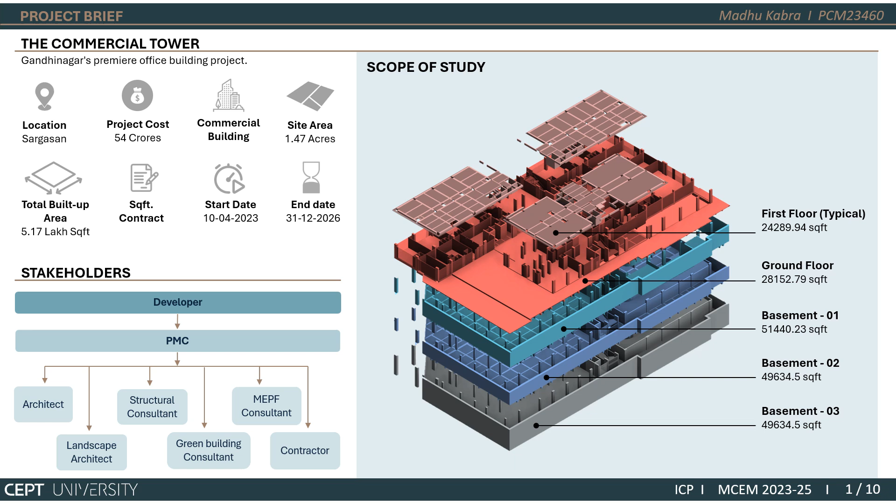The project consisted of 3 basements and ground plus 14 floor structure. For the scope of study of this semester, we have taken 3 basements, ground floor and first floor. The stakeholders involved in this project are the developer, the PMC, then various consultants such as architect, landscape consultant, structural consultant, green building consultant and MEPF consultant, and the contractor who is going to construct the building.

The project was studied in groups of 4, where each member assumed different roles. My role was of an architectural consultant and mechanical consultant. 2D drawings were taken from the site and a BIM model was generated out of it based on our respective roles. The architecture model was developed till LOD 400 level and mechanical model was developed till LOD 300 level. Major hurdles that we faced in the process was that we didn't find relevant details in the CAD to generate BIM out of it, and the lack of software knowledge.

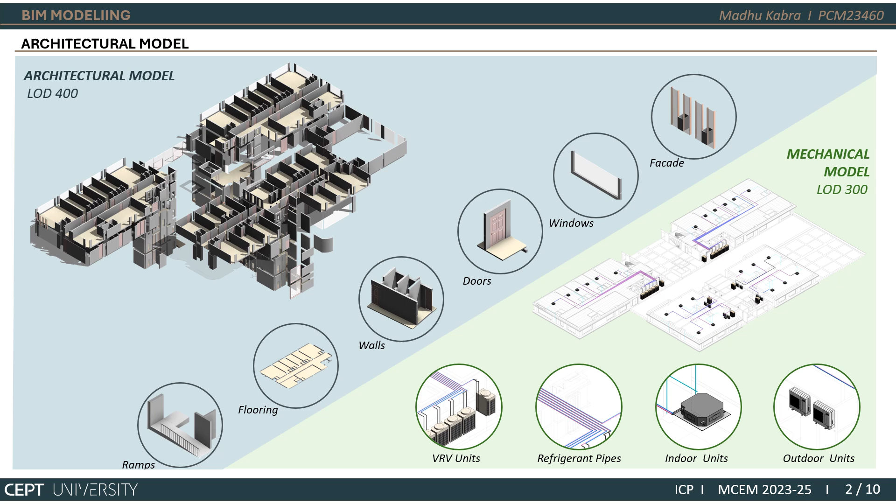BIM models for all the disciplines were made, and then clash detection process was run for each discipline so that a clash-free model was generated. After that, a quantity takeoff was done, which is basically a process to estimate the material, resources, and labor needed to complete a project. So for this, we have done quantity takeoff for architectural, structural, and all the services. As an example, I am presenting architectural elements here.

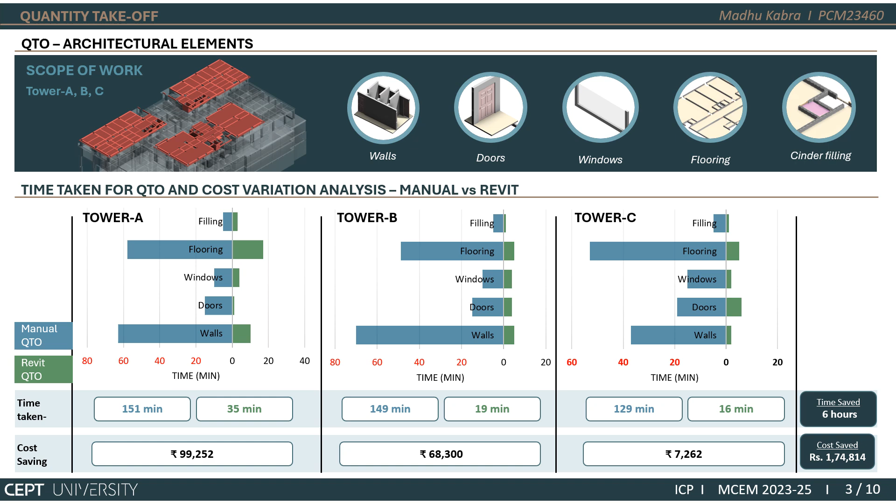The scope of study was first floor of tower A, B, and C. The quantity takeoff was done for walls, doors, windows, flooring, and cinder filling. The chart here shows the time taken in quantity takeoff process in manual versus Revit. If you see, the total time saved was around 6 hours by using Revit in quantity takeoff, and the total cost saved in quantity variations, which was there in manual versus Revit, was around 1,75,000.

The challenges in Revit quantity takeoff we found were that we couldn't identify which material belonged to which tower, therefore contractor had to tag every element as per the building. This could have been improved if this process was involved in the BIM modeling itself. And the schedule showed both areas and volumes for each material, which was irrelevant.

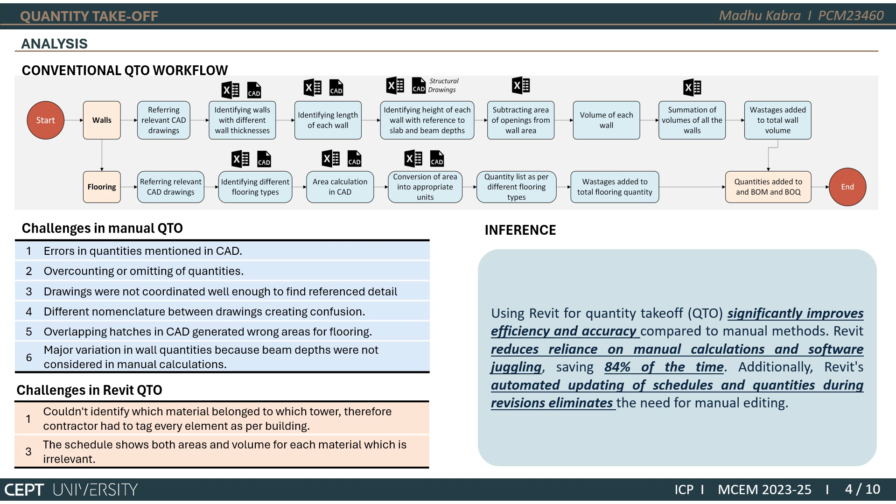So for quantity takeoff, using BIM significantly improved efficiency and accuracy compared to manual methods. It reduced reliance on manual calculation and software juggling, saving up to 84% of the time. Additionally, Revit automates the process, and automated updating of schedules and quantities during revision eliminates the need for manual editing.

The Last Planner system is a project management methodology that helps teams plan and complete projects more reliably. It is based on lean construction principles. Last Planner system was implemented in two parts. One was for design activities, that is all the assignments and the studio activities which we undertook. And the second was site tracking. So we went and implemented Last Planner system on the site we were assigned.

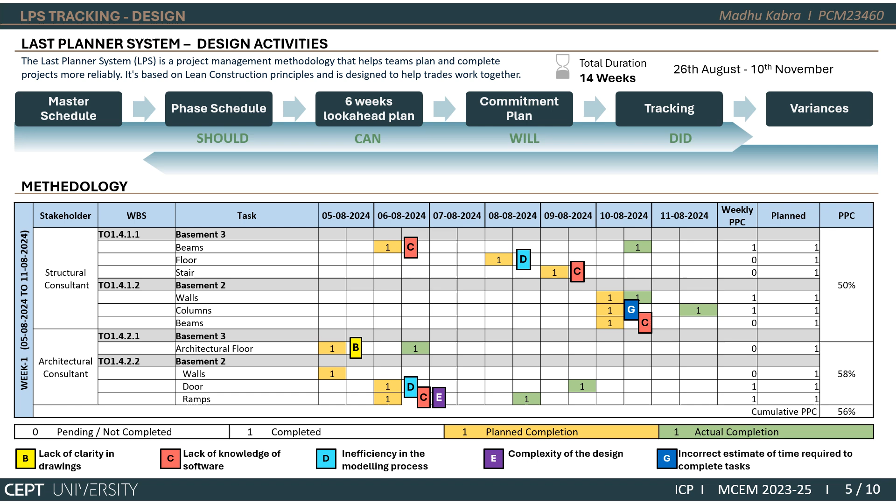So the table below shows the methodology in which we implemented Last Planner system. The tasks mentioned are all the commitments given by each stakeholder of the group. And then the commitment dates were recorded, and by the end of the week, the actual progress of the work was tracked. If there was a delay observed, then the reasons for delay were identified, and then the final PPC of each member was recorded. Few of the reasons of variance recorded were lack of clarity in the drawings, lack of knowledge of softwares, inefficiency in modeling processes, complexity of design, and incorrect estimates of time required to complete tasks by the stakeholder.

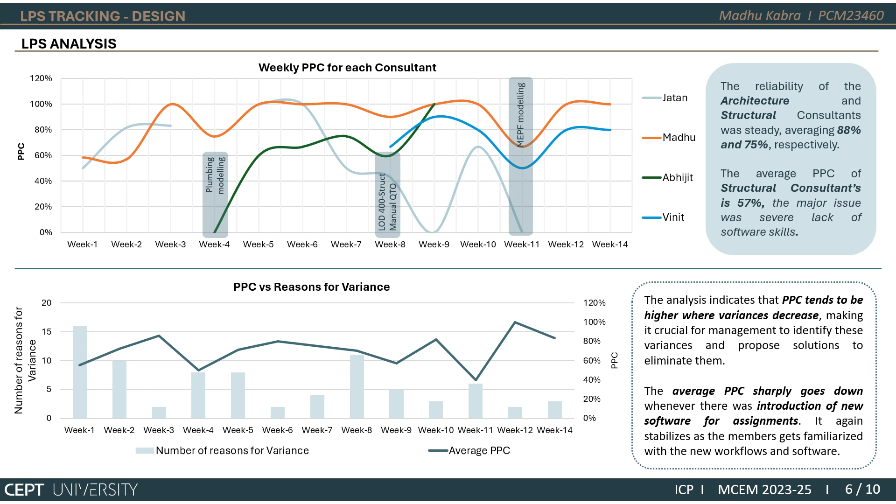The average PPC also sharply goes down whenever there was introduction of new software assignment. So it again stabilizes as the member gets familiarized with the new workflows and softwares.

This slide shows LPS tracking for site execution works. The total scope of work which was observed by us was for 5 weeks and for two towers, Tower A and Tower B. The look-ahead planning was done sitting with all the teams on site, that is shuttering team, concreting team and reinforcement team. All the activities were mapped by each team and were put up as shown in the

chart. In the beginning of week 1, it was committed that the third floor RCC works would be completed by end of week 2. By the end of week 1, these activities were tracked. The slab and beam shuttering, staircase shuttering, column casting, and slab reinforcement was completed as committed

by each team. But at the end of week 2, it was observed that the management shifted major workforce from Tower A and B to Tower C. So therefore, there was a shortage of labor for Tower A and B, due to which the casting of slab and beam had to be shifted to week 3 due to lack of resources. So therefore, our milestone of completion of third floor RCC works also got shifted to week 3.

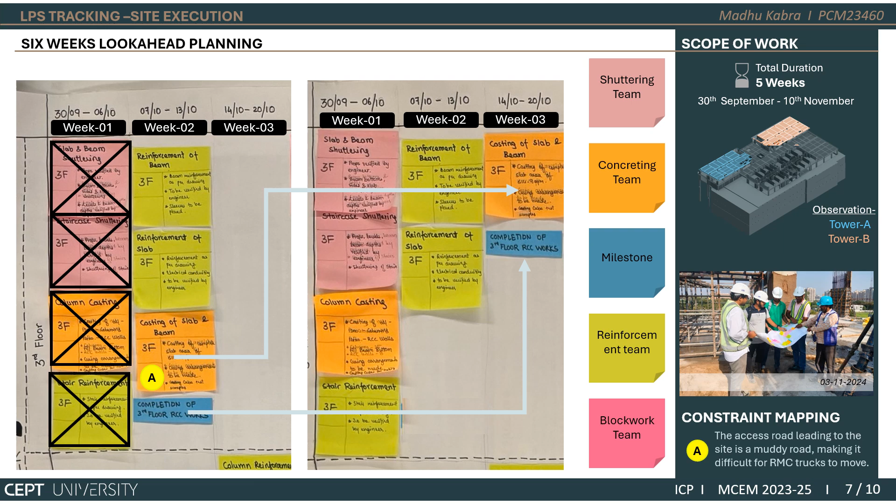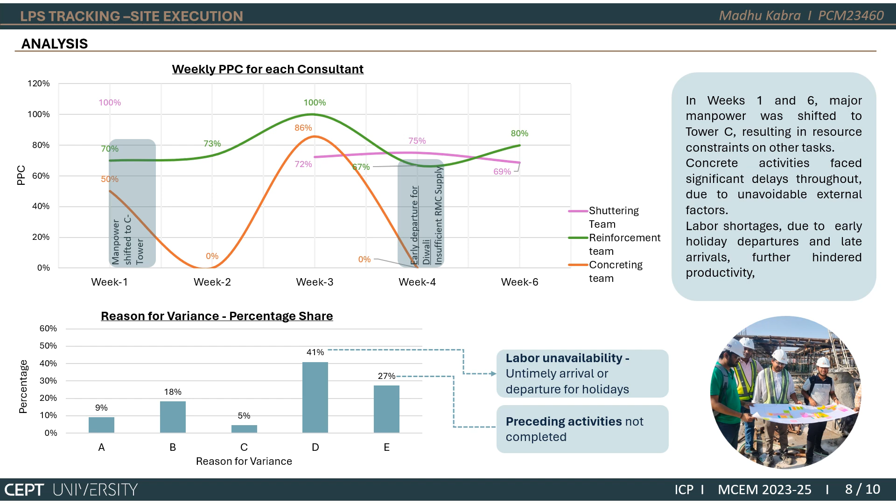So for a 4D simulation use case, we took one of the most complex parts of our design, that is the architectural facade. So the complexity of this design lies in placing a lot of planter boxes that come in the facade and which will have a lot of plants, and then having these expanded metal sheets in the facade which are going to protect the building from harsh weather.

So during the 4D simulation of the facade, this was shown to the site personnel. They realized that there would be a space issue for installing the irrigation pipe after fixing the MS expanded sheet and the planter box. So this highlighted the need to install the pipe earlier to avoid complications. So this helped us revise the sequencing of the work where instead of the irrigation pipe coming at the end, it was installed earlier in the sequencing, which will help the plumbing team to execute the work in a proper way.

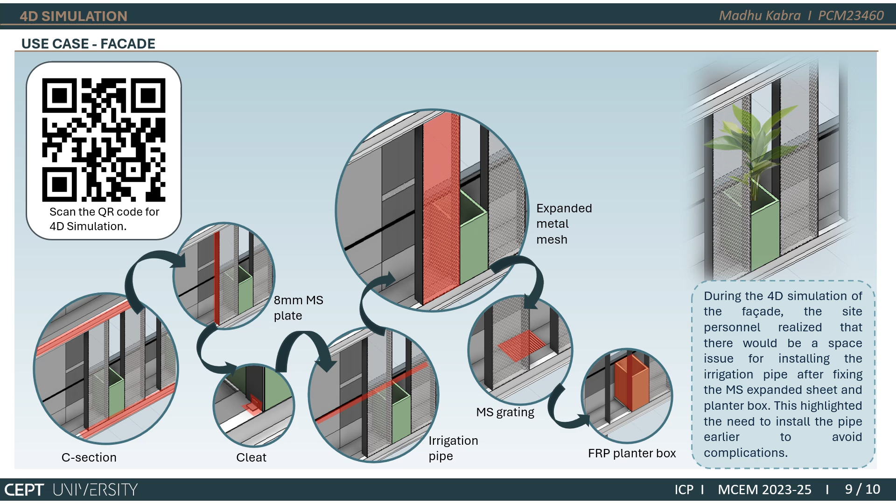So in conclusion, in quantity takeoff, BIM simplified accurate quantity takeoffs and saved time and energy while doing it, making it a valuable tool for contractors to enhance efficiency by using BIM generated quantities. In BIM modeling, creating the project model while comprehending the various services it encompasses, while also effectively illustrating how different stakeholders collaborate and understand the need of a common data environment.

The last planner system facilitated a deeper understanding of making commitments, identifying reasons for variances, recognizing constraints early, and applying insights for improved PPC and ongoing progress, facilitating continuous learning and improvement. In 4D simulation, performing a use case analysis of a complex design helped in better understanding of a project by all the stakeholders, helping them to provide more relevant inputs.